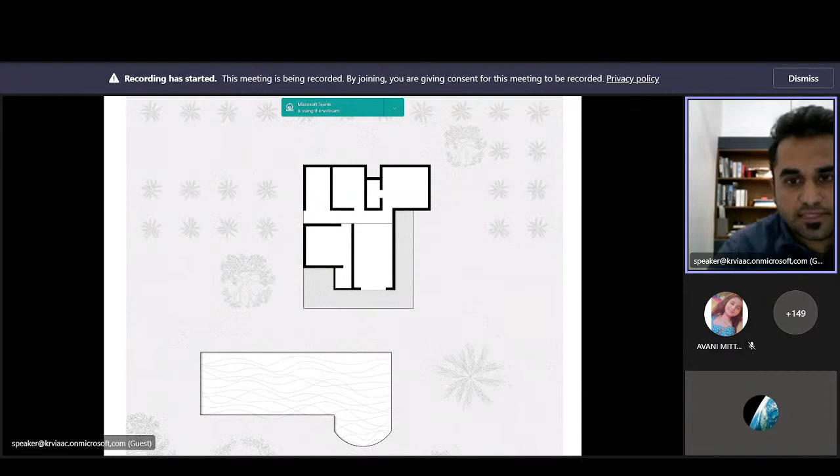While we had this project, the exciting part of the project was that it was located in a beautiful arecanut plantation estate. But the challenge was that there was already an existing farmhouse. This is how the farmhouse was existing at the site with a pool. And what we decided is that we will design and reuse part of the old material of the project.

So all the old Mangalore tiles were salvaged and we made walls of those. The old existing plinth was only extended. The existing walls of the project were reused. The exposed wire cut bricks were also reused.

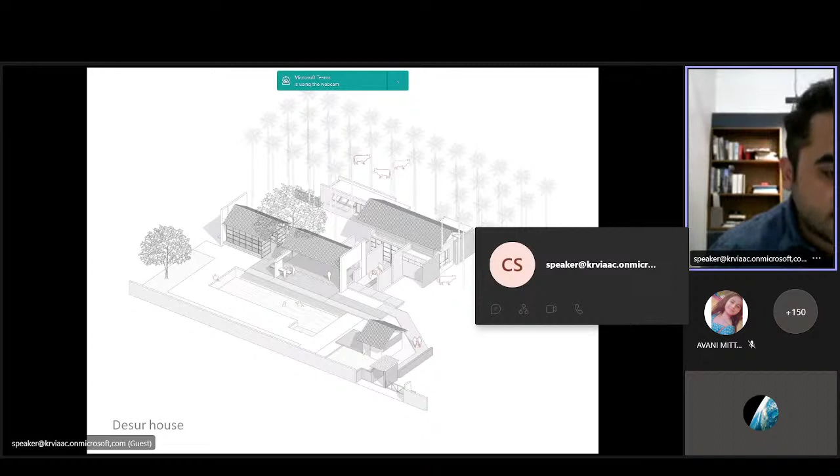So the site is buffered by arecanut trees and sugarcane fields, and it harbors a weekend home that grows between what has always existed on the site. A part of the new design has sprung out of the plinth and the walls of an existing old farmhouse. So this is the evolution of the design.

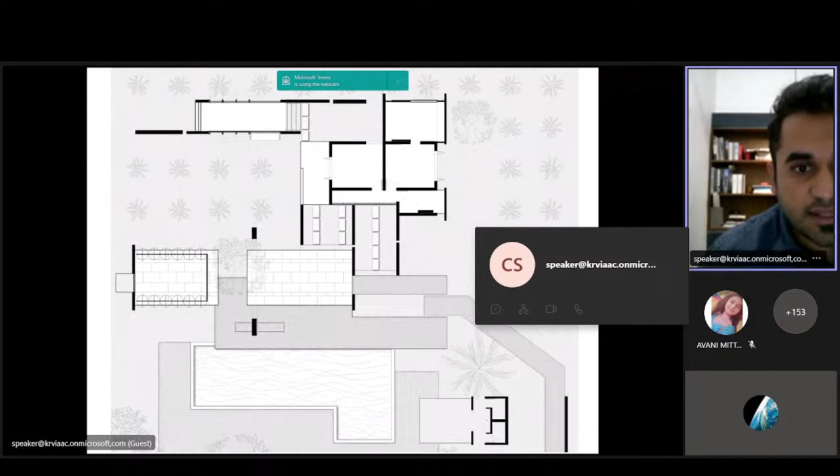That's the existing farmhouse. You see the walls getting demolished. The bedrooms turn into courtyards. The shape of the pool changes. There are additions of bathrooms and living pavilions and the kitchen, more decks, landscape and furniture.

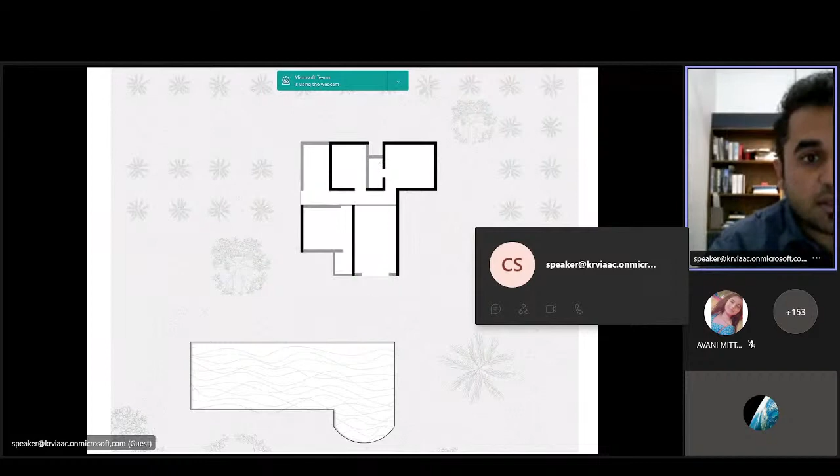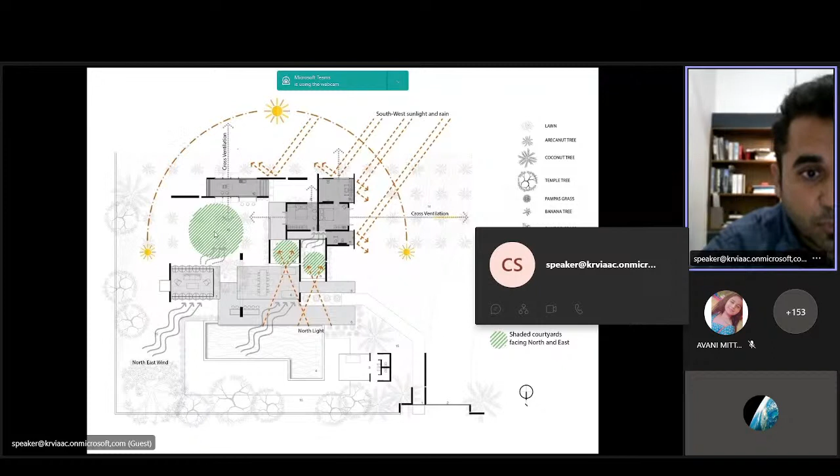So what we noticed at site is that the pool was on the north and the existing plinth, which is the dark gray, was on the south. So we had a mid portion between the two to play with. Considering the sun path, the wind direction, the southwest monsoons, we decided to have courtyards on the north, in the center, and in the east. This keeps most of the courtyards shaded during the day, and they also capture the north light through the openings on the north.

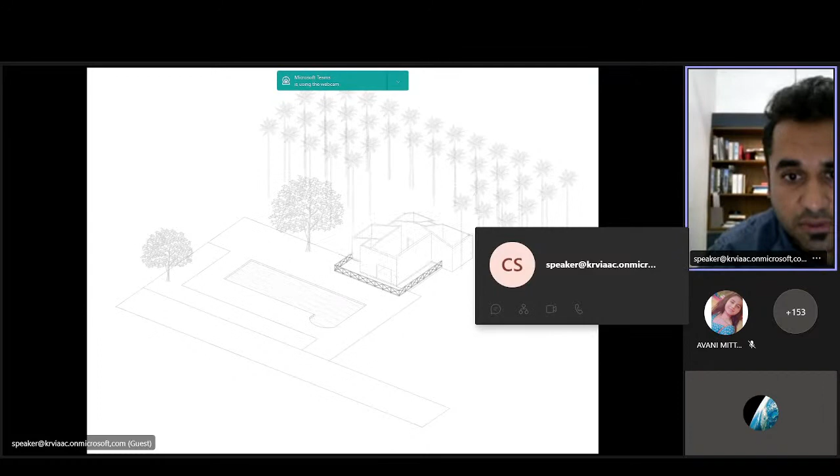Another evolution, GIF image. You see that the house is kind of a metamorphosis into a new design.

So on arriving, you visualize a series of walls that are placed at different heights. This accentuates a sense of motion to the architecture, also metaphorically connects the earth and sky with its verticality. Though the overall floor plan is choreographed by pure geometric spaces, the intent is to achieve non-linear movement for the user.

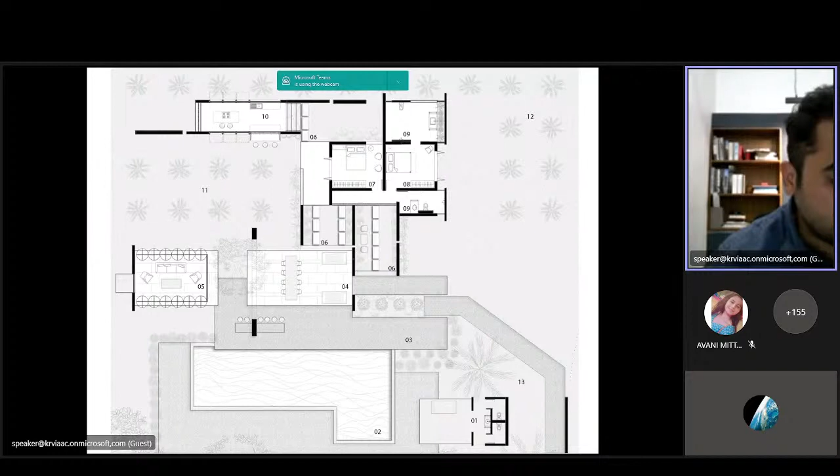A bar counter and a swing protrude out of the central beam under the mango tree, creating a division between the dining and living spaces. All of this is mirrored in the black basalt pool.

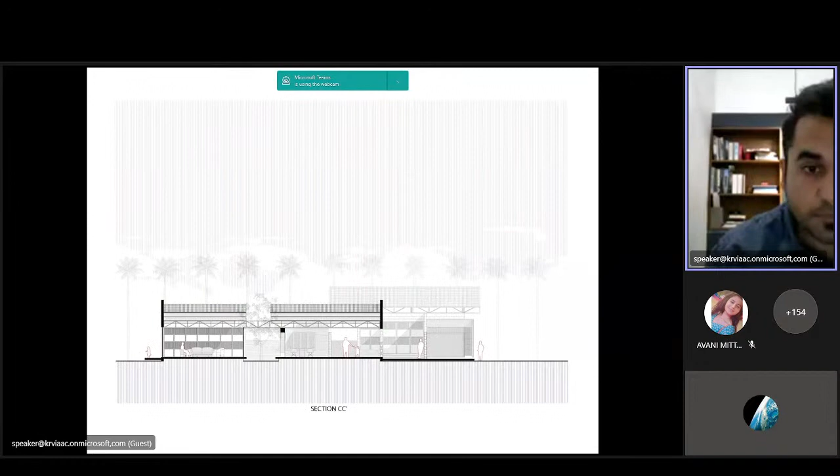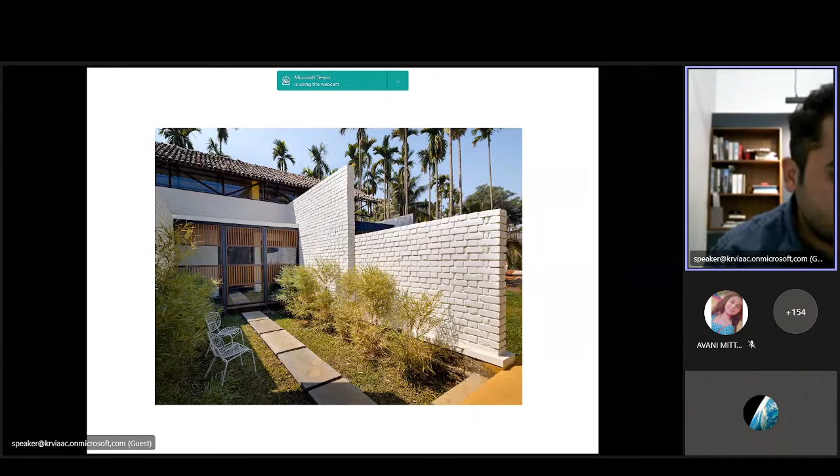A series of rectangular parallel walls are juxtaposed to form small courtyards that act as wide thresholds between the living and bedroom areas. The occupants are transferred into a more restful region of the built form, which holds the bedrooms. Yet this shift retains the connections with the outdoors.

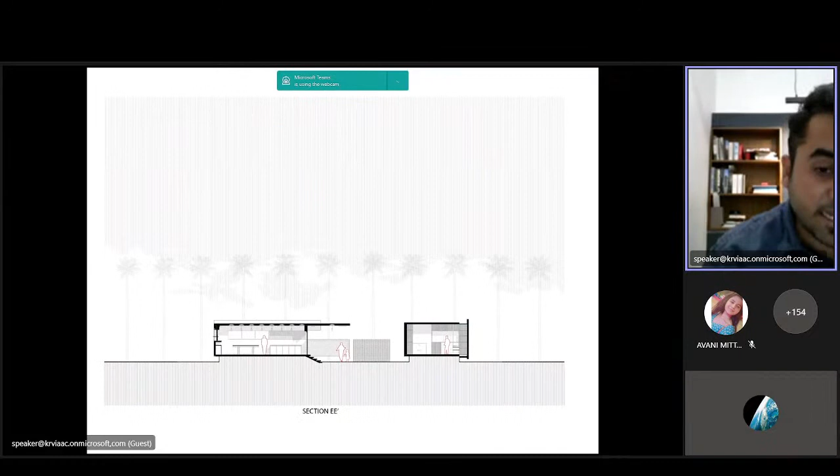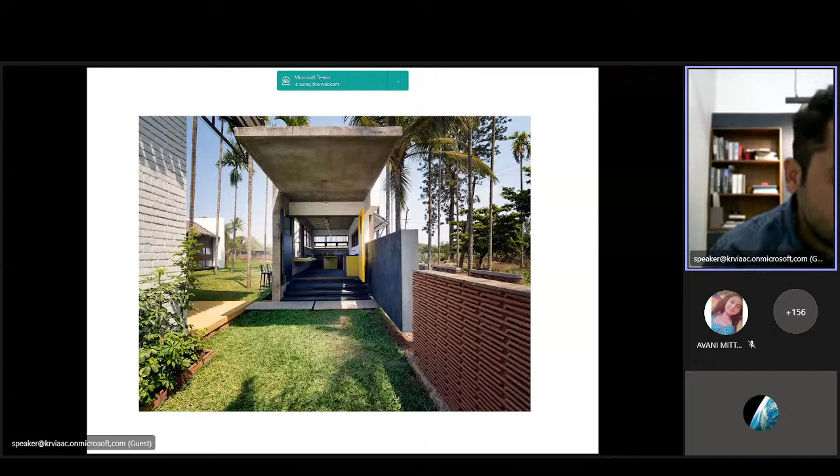Lastly, a kitchen block is designed with its independent filler slab. Placed in isolation, it has more of a community character than a pure domestic kitchen. The kitchen has a direct dialogue with the courtyard in front and a kitchen garden at the rear. The indoor serving platform of the kitchen extends outdoors into the courtyard, floating out as a large dining table.

Inspired from vernacular courtyard homes, it aims to recall this through colors, textures, materials, and spatial qualities. The wire-cut bricks, unplastered concrete filler slabs, kadapa floorings, and black and yellow oxide treatments give it a vernacular home-like feel.

The black basalt swimming pool is influenced by the basalt step wells and ghats, vernacular to the architecture of the Deccan Plateau.

The openings are designed to maximize the entry of north light through the courtyards. The pivoted wooden screens can be adjusted to different degrees of seclusion considering the season, time, and purpose of activity. The teak lattice fenestrations throughout the design enable a smooth relation between indoors and outdoors.

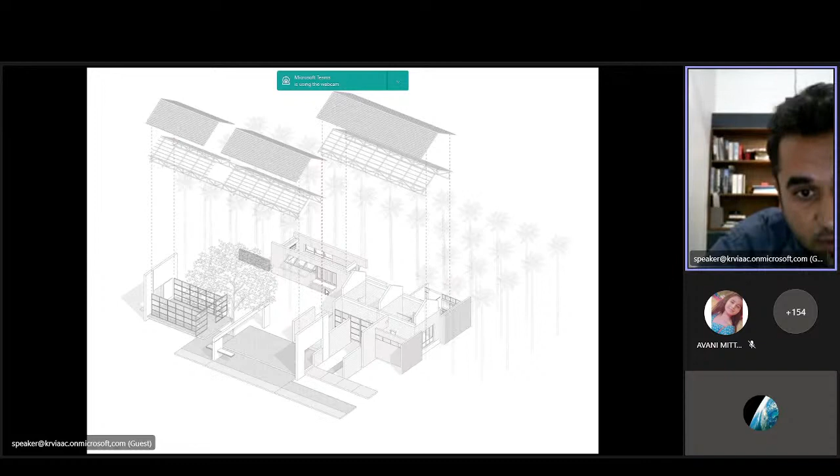Toilet blocks have been floated out on either side. We also have a new living-dining pavilion that splits across the existing mango tree. Lastly, we have a kitchen block added on the rear, which is independent so that it has more of a community kind of kitchen than just a household kitchen.

Coming to the second project that I have here to present is our own studio, located at Havelock Road at Camp in Belgaum. If you are familiar with Belgaum, it has a history of cantonment, and it was a stroke of luck that I happened to stumble upon this building.

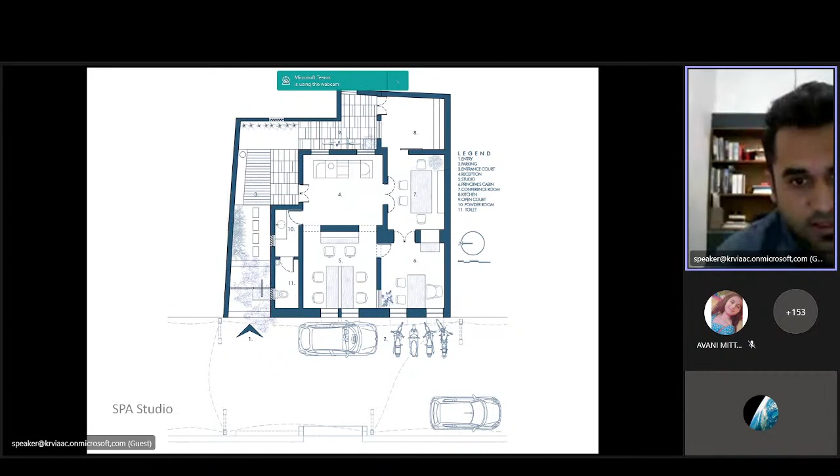While I noticed the building, it was in this state. So again, this project too didn't start with a blank slate. There was a century-old story already written at the site. An old house was remodeled a couple of times for each of its tenants. A year ago, it came into our sight, and then we identified it as a suitable space for a studio.

We had to open up the internal walls to accommodate an open, free-flowing space with usable internal connections. The house originally opened onto a street. In this image, you see the street in front where the house opened.

At the rear corner, you can see the door of the house with just two windows. On the left-hand side of the image, you see a stone wall, which was the outdoor toilet block and the backyard of the house, which we turned into the front. We made it into a lucrative entrance garden, a courtyard entrance for our purpose.

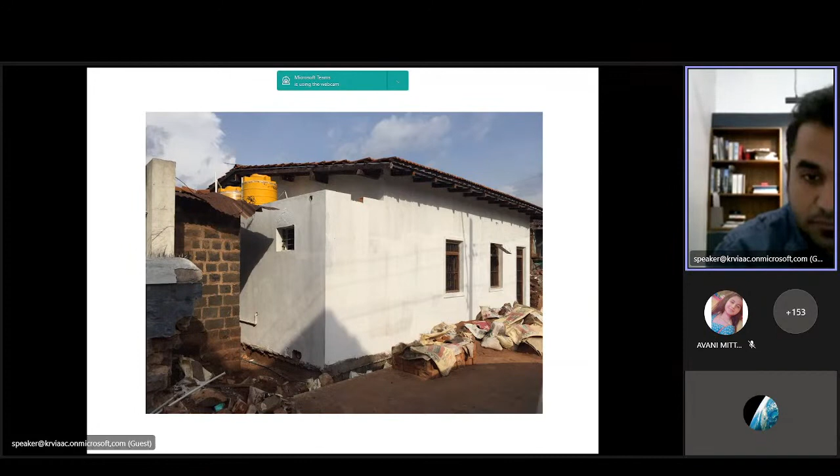So this is the evolution of the house turned into a studio. And that is it.

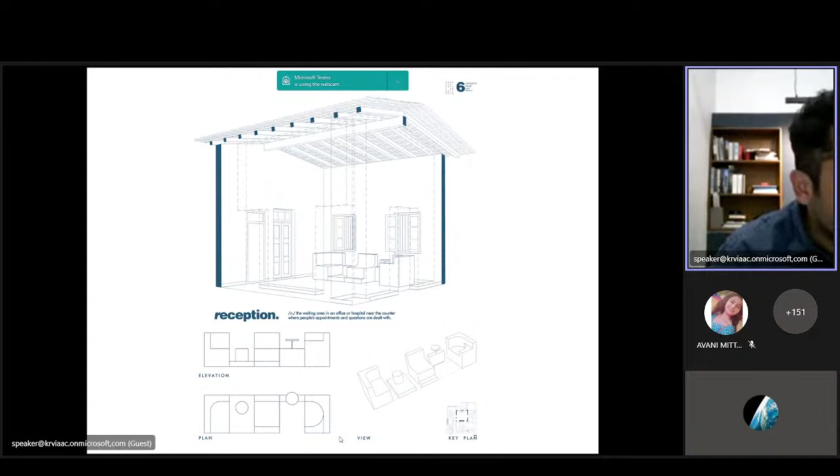As you enter the studio, you are welcomed by the reception area. It has a lounger at the entrance room, which is a play of 5 cubes. It's seen here in the graphics, where each of the 5 cubes is scooped out to serve as seating and teapoy units.

The 5 can be arranged in various permutations. It is carpentered in plywood so that it is light and can be moved, and it is polished with a micro topping cement finish to give it a smooth, monolithic kind of personality.

We had photographer Drupad Shukla, who abstracted the human scale with the furniture and played with the photography of the furniture.

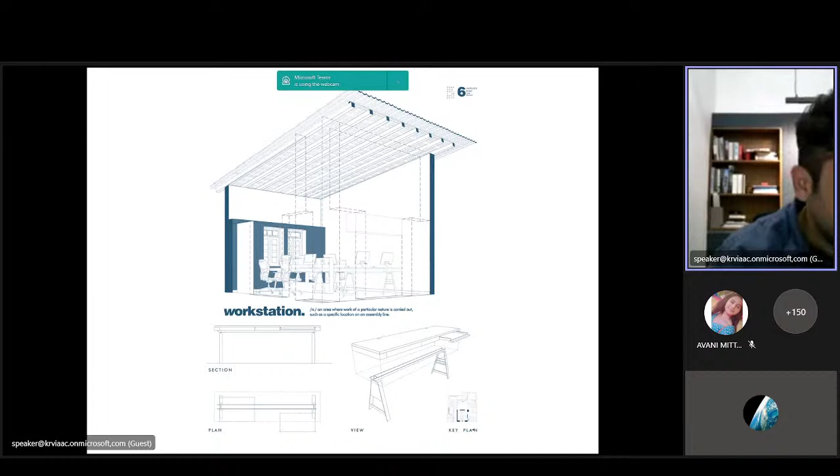Adjacent to the waiting room is the room that houses the desks for the workstations for the architects and the interns. The desks are placed in an informal manner, considering circulation, light, and ventilation. Again, the desks are carpentered in teak with custom-made legs that also act as storage units.

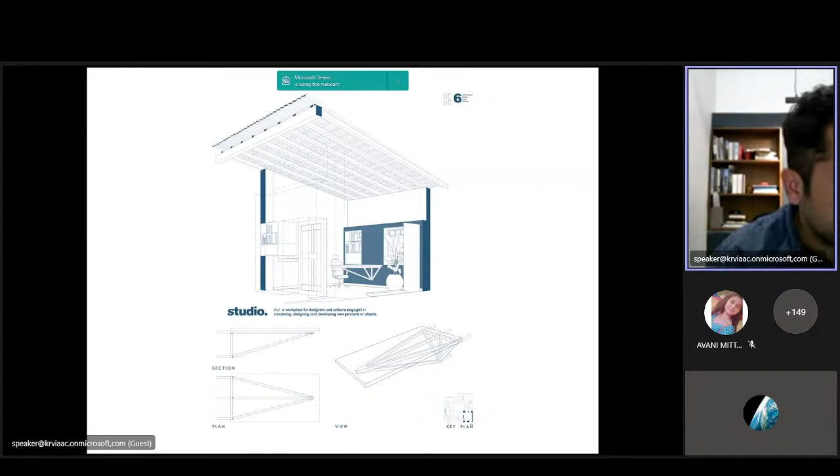Overlooking this is the principal architect's studio or workspace, which has a floating kind of table with no legs. All the weight of the table is taken by a truss, which is scooped into the 2-feet-deep mud walls.

A conference room is positioned parallel to the architect's workspace. This room can be accessed directly from the waiting room.

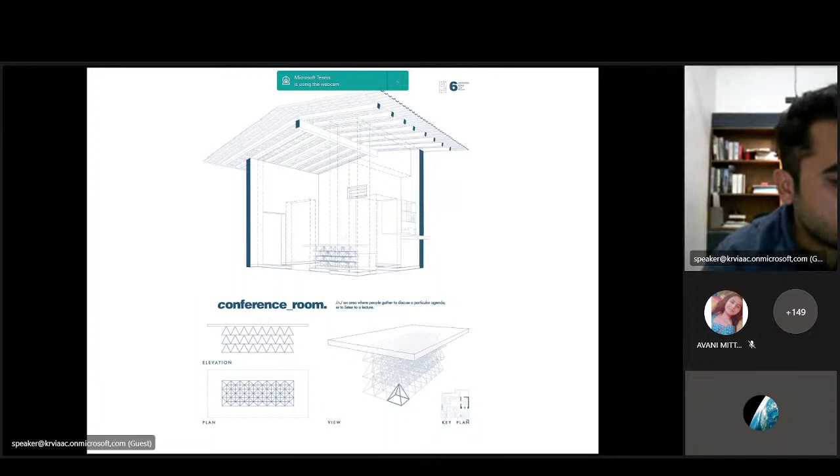So we designed a table for the conference room that had a series of space frame fabricated structures piled over each other.

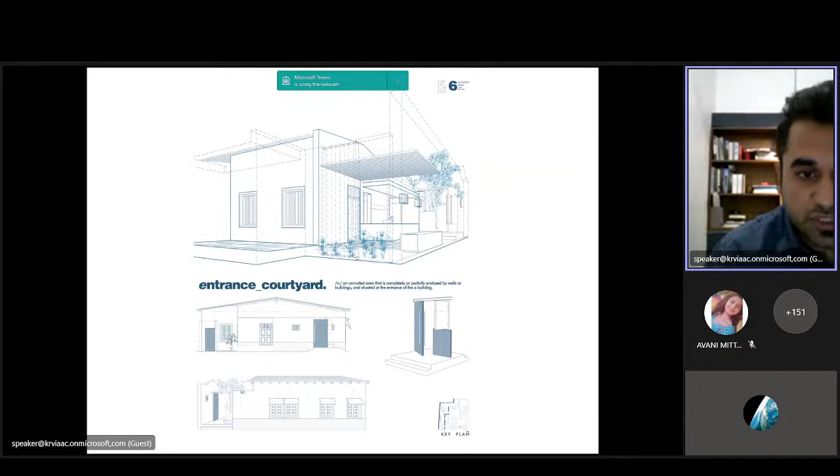Located on a quiet street with neighbors on 3 sides, the only visible side of the building was the west side, which also acts as the main elevation of the building. It also had to be protected as the west would get a lot of rain, so we protected it with a thin sheet of Corten metal, which acts as chhajas suspended by twisted metal cables.

Along the northern end of this is the entry to the property. This is marked by the presence of a large metal door painted in dark blue, coupled with a small pivoted window and a temple tree.

As you enter the courtyard, a cast in situ concrete bench is placed along the compound wall, in combination with wooden flooring, kadappa flooring, and an exposed concrete wall.

The space is shaded by pergolas that run from north to south, casting dramatic shadows on the white stucco finished compound wall throughout the day. Not only does this space serve as a celebrated entry to the studio, but it also performs as a space for informal discussions and tea breaks.

A set of Kadapa stone fins are positioned at an angle to form louvers that let in light and ventilation for the neighbors on the other side, because that originally used to be the back window to the neighboring house.

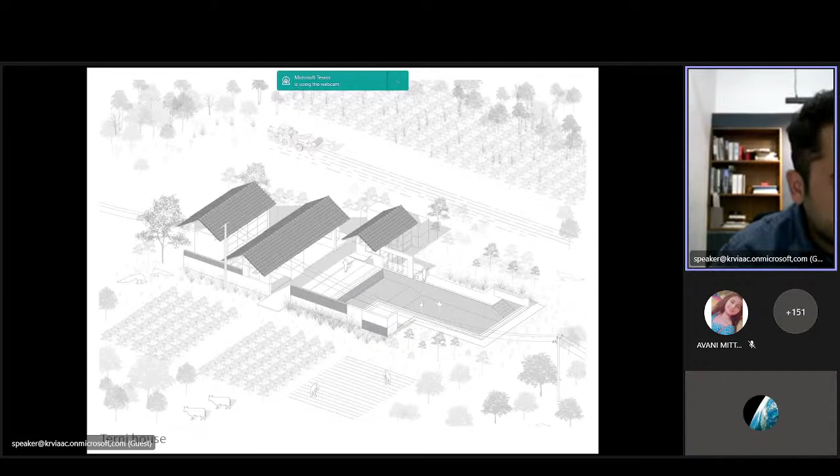The drive to the farmland from the city takes you through a series of villages of Karnataka and Maharashtra. As you drive to the Terni village, you have these impressions of the local village settlements, and there is a strong character of rural material palette, simplicity in architectural style, a sense of rootedness, the humble lifestyle, which is a contrast to city life.

So the client strongly wished to have a slice of this in their weekend getaway, and we as architects had a contemporarized take on it.

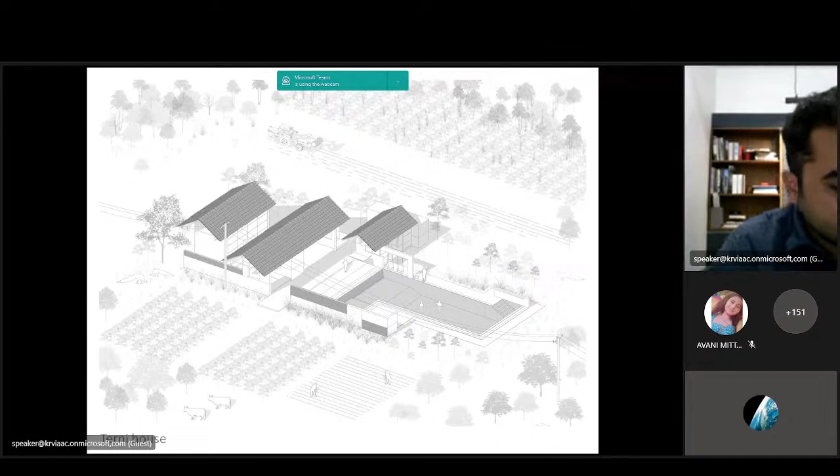So like all village homes of this region, this built form is basically divided into three main spaces. One dedicated to daytime activities such as lounging, eating, cooking, and entertaining. A second space flanking along the swimming pool and the deck holds the bath and the restrooms.

Lastly, an elevated space is positioned right across these spaces for a good night's sleep. Unlike a typical village home, sheltered under a single gable roof, each of these spaces is sheltered by its own independent roof.

Now, these three units are spaced apart from each other, such that the cantilevered gable ends of each roof slope into the buffer spaces, which form the softscapes and the hardscape courtyards.

The house disperses itself within a compounded boundary right in the middle of the fields, only to secure its users from the unknown wildlife. As one approaches through the east, a large lawn is set around the swimming pool, and the pool connects the house at the west end.

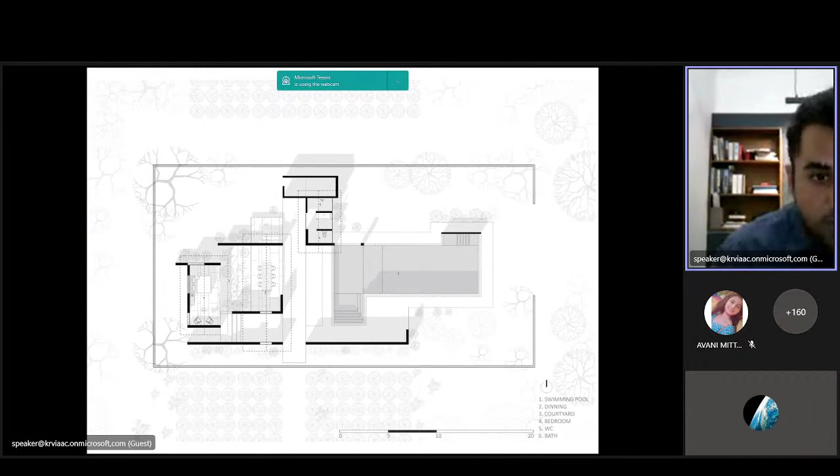The bedroom is independently placed on a higher plinth with aluminum sliding windows that open up the bedroom.

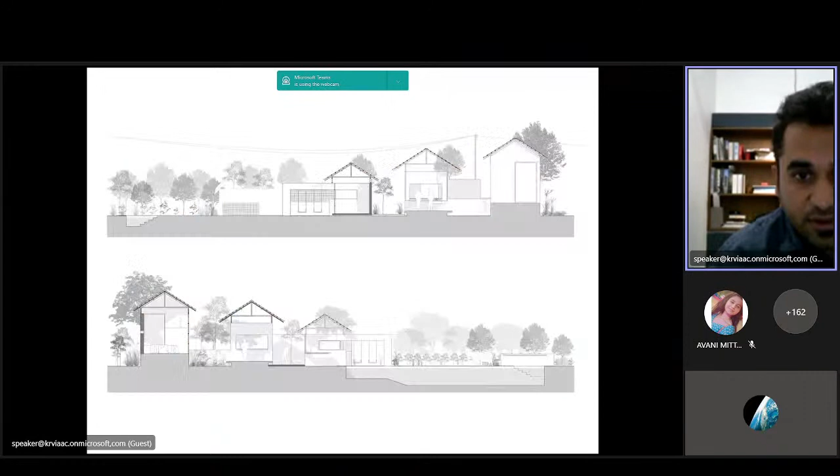Let's have a look at these images. This is the toilet block, the bedrooms, and a few of our sections.

So the bedroom is independently placed on a higher plinth. A slim slit window is cut open on the west that frames the mountains far across the farmlands, and it has these dramatic sunset views in the evening.

The material play of this project strikes a balance between vernacular tones and contemporary hues, bringing warmth and elegant attitudes at the same time.

A twin swing arrangement is casually hung to one of the beams so that one can swing over the swimming pool, and there's a certain kind of play happening around the space. Right across, there is a breakfast counter that cantilevers out under the gable roof.

The entire built form is arranged as a system of interlocked pavilions connected to one another by open corridors, independent standing walls, and floated floor plates.

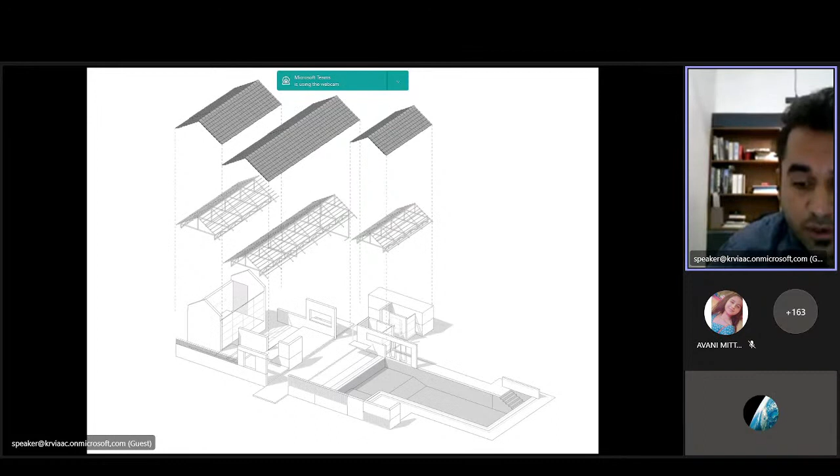So these are the three projects that we have completed and published. Apart from this, recently we have completed a few projects, and I'd like to give you a peek view into it. We are all contextually crafted by the environments we live in, and architecture is a strong, powerful tool for it.

So we articulated a series of brise soleils on the south with circular windows, which bring in abstracted patterns of shadows throughout the day. We also added a lot of staircases, courtyards, and garden courts along the south, so all the classrooms are pushed to the north and the east.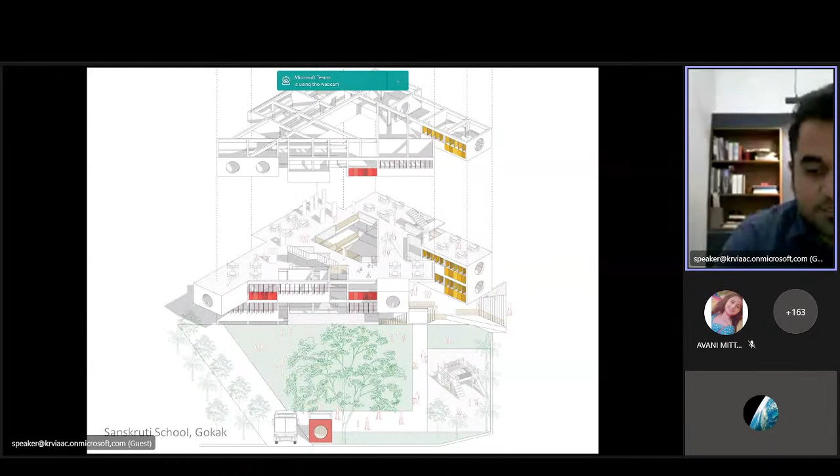These are a few of the recently shot images. As you see, we've considered the typology of the building, the usage, the kids, the colors, the palette, and tried to achieve the right design, I believe. In some more images you can see the kids are now very comfortable with the circular windows, the levels, and the brise soleils, using them as part of their everyday play through the school.

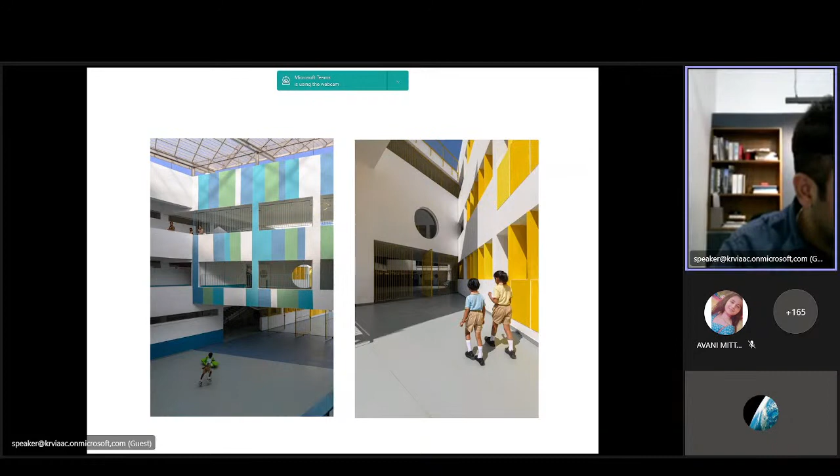Here's the model of the project.

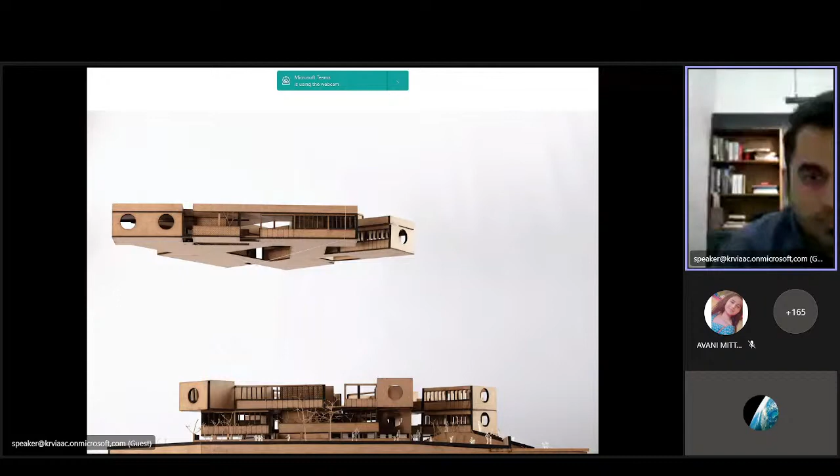Here's another project that we will soon publish, probably 6-8 months from now. It's the Jain Muni Nivas. If you look at the plan, it resembles a swastik. Incorporating a swastik and the basic elements of Vastu is how we've designed this with 4 courtyards, each courtyard having a specific function, and each of the rooms having a specific function.

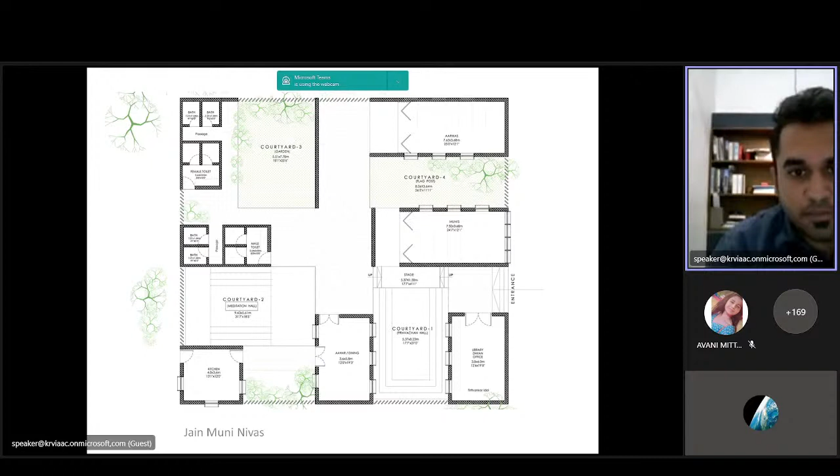This is a religious building, basically for the Jain Munis who travel from different towns through Belgaum. They need a place for shelter and food, and this is going to be a place for that.

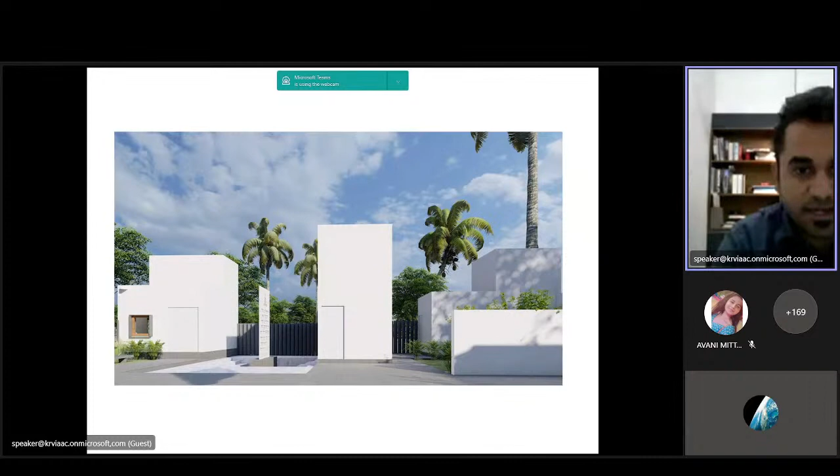We got inspired through the minimalist white color, which the Jain monks dress in — the Jain female monks are also clad in white. So we wanted this place to have just the very basic tone of white and greenery around it. We've inspired the spatial qualities through the Palitana kind of shikaras, trying to contemporarize the same courtyard-shikara, multiple courtyard and shikara arrangement in a more modernist way. We are looking forward to cladding the entire building in white marble.